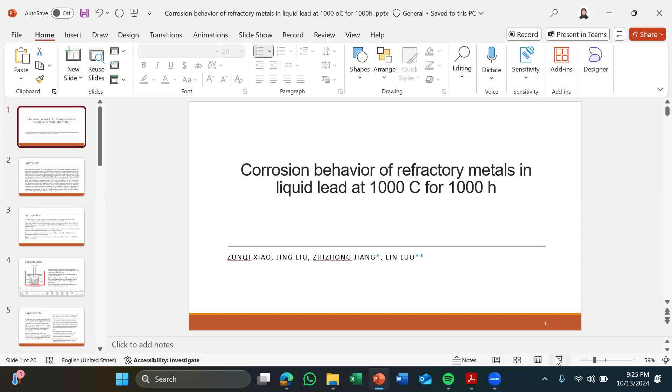This time I will continue to review a new paper. The title is Corrosion Behavior of Refractory Metals in Liquid Lead at 1000 degrees Celsius for 1000 hours by Zunqi Xiao et al., Lin Luo et al.

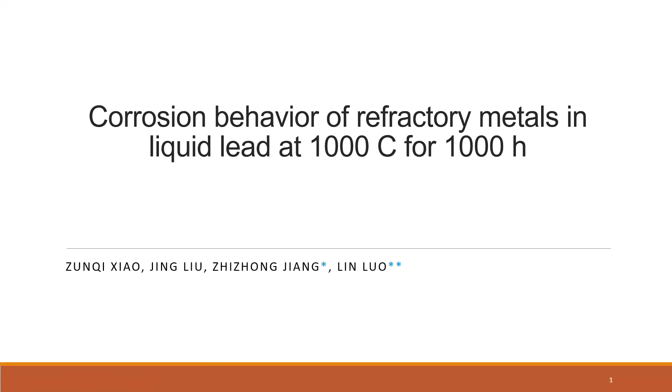For this paper, about the abstract, the lead-based fast reactor (LFR) has become one of the most promising reactors for Generation IV nuclear systems. A developing trend in LFR is high efficiency along with operation temperatures up to 800 degrees Celsius or even higher. One of the key issues in the high efficiency LFR is corrosion of cladding materials with lead at high temperatures.

In this study, corrosion behavior of some refractory metals, niobium, niobium alloy and molybdenum, was investigated in static lead at 1000 degrees Celsius for 1000 hours. The results showed that niobium and niobium alloy exhibit intense dissolution corrosion with obvious lead penetration after corrosion, and lead penetration extends along the grain boundaries of the specimen.

Furthermore, niobium alloy showed better corrosion resistance than niobium as a result of elements of W and molybdenum included in the niobium alloy. Molybdenum alloy showed much better corrosion resistance than niobium and niobium alloy, and no lead penetration could be observed. However, an etched morphology appeared on the surface of molybdenum alloy, indicating the occurrence of corrosion to a certain degree.

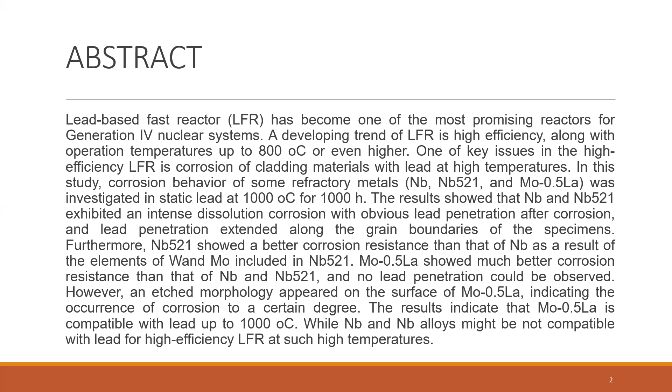The results indicate that molybdenum is compatible with lead up to 1000 degrees Celsius, while niobium alloys might not be compatible with lead for high efficiency LFR at such high temperatures.

And next, talk about the introduction. The development of materials highly corrosion resistant to lead-bismuth and lead environments is one of the key issues of development of LFR. Rivai et al. studied the corrosion behavior of some refractory metals (W, molybdenum, and niobium) in LBE with oxygen concentration of 5 times 10 to the power minus 6 weight percent at 700 degrees Celsius by means of stirred-type corrosion test.

Also found that molybdenum and tungsten exhibit high corrosion resistance to liquid lead with oxygen concentration of 4.5 times 10 to the power minus 7% at 700 degrees Celsius. However, investigations on corrosion behavior of these materials in LBE and lead at temperatures above 700 degrees are limited. So in the present study, corrosion behavior of some refractory metals in static lead at 1000 degrees Celsius for 1000 hours was studied.

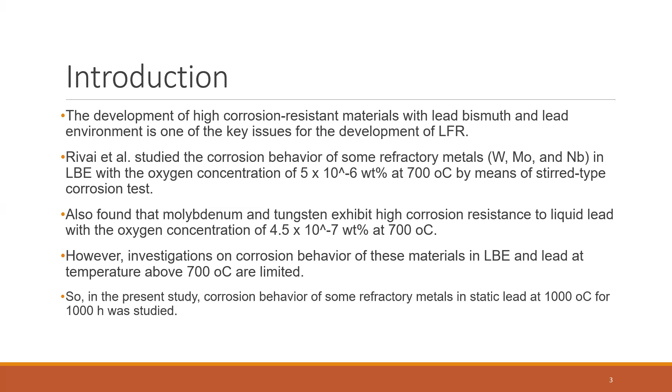This is a schematic diagram of the corrosion device. The materials tested in the study were three commercial refractory metals: niobium, niobium alloy, and molybdenum alloy. The corrosion medium used in this study was lead. Its purity was 99.99%, and the size of the crucible was 180 millimeter in height, 110 millimeter in outer diameter and 5 millimeter thickness.

The quantity of the liquid was 12 kilograms in the experiment, and the gas system was to provide an inert gas, argon gas environment in the tank and crucible. This table is about the chemical composition of test materials in weight percent, about niobium, niobium alloy, and molybdenum alloy.

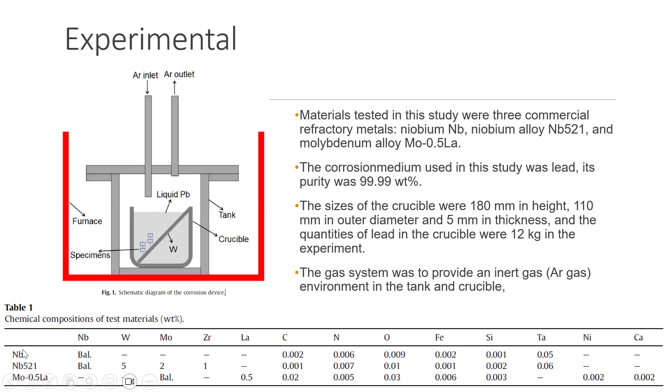In this experiment, the density of W is much higher than that of lead, so the specimen fixed on the W block got immersed in liquid lead instead of floating on the surface of liquid lead. The temperature of liquid lead was 1,000 degrees Celsius. The total time of the corrosion test was 1,000 hours, and specimens were taken out from liquid lead at 500 hours and 1,000 hours, respectively.

After the corrosion test, half of the specimens used for surface and weight loss analysis were immersed in liquid LBE at 380 to 400 degrees Celsius under the protection of argon gas to remove the residual lead. And then they were immersed in hot glycerin at 160 to 180 degrees Celsius to remove residual LBE.

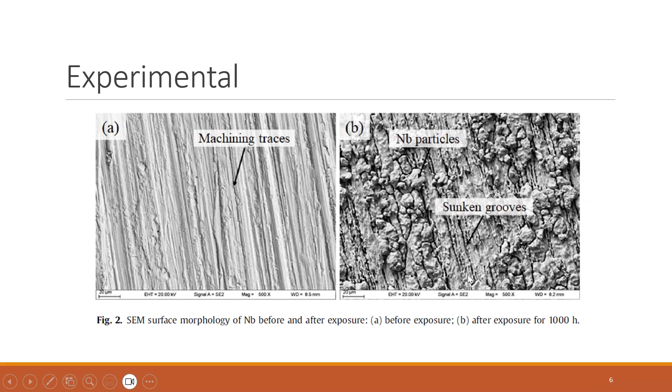And this is figure 2, SEM surface morphology of niobium before and after exposure. This is before exposure, you can see the machining marks, and this is after exposure for 1,000 hours. So these are Nb particles, and these are sunken grooves. And in figure 3, we can see SEM cross-sectional microstructure of niobium after exposure. This is for 500 hours and this is for 1,000 hours.

So we can see the difference in lead penetration. So yeah, you can see after 1,000 hours the lead penetration is deeper, more inside. And this is the EDS line scanning image. So we can see this for oxygen, this for lead, and this for niobium.

And you can see for niobium, the count is higher at between 40 and 60 micrometer.

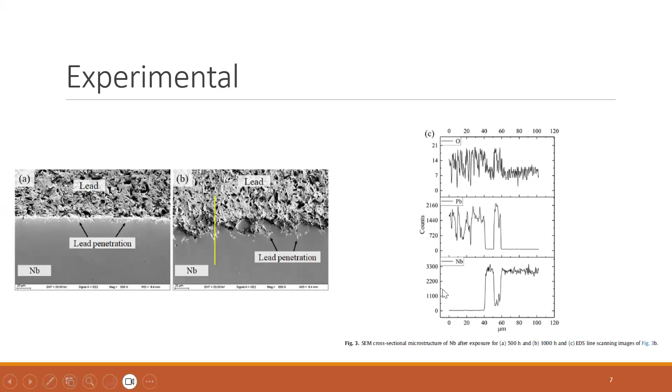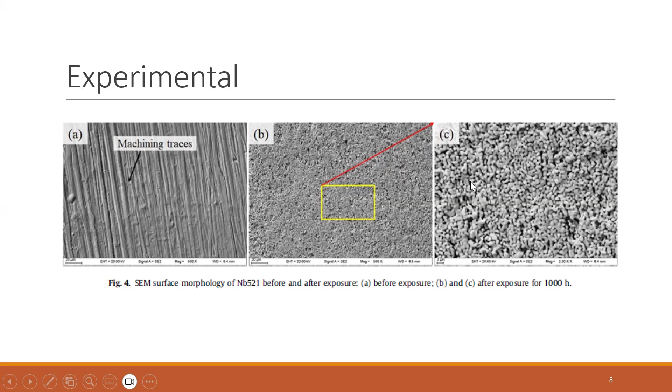And this figure 4 shows the surface morphology of niobium alloy before and after exposure. This is before exposure, we can see machining traces, and this is after exposure for 1000 hours. You can see in this part, if we zoom in, we can see the same surface morphology. And talk about the result.

Before exposure, niobium specimens showed clear machining traces, and uneven corrosion occurred, forming deep grooves along machining traces, and particles were also observed. After 500 hours, lead penetrated the niobium specimen to a depth of 5 to 10 micrometer. The interface was relatively flat, indicating the early stage corrosion.

After 1000 hours, penetration increased to 20 micrometer and the interface became uneven. Some of niobium particles peeled off. EDS analysis shows the trace of oxygen diffusion into the niobium specimen, indicating dissolution corrosion. The weight loss of niobium after 1000 hours was 178 gram per meter squared.

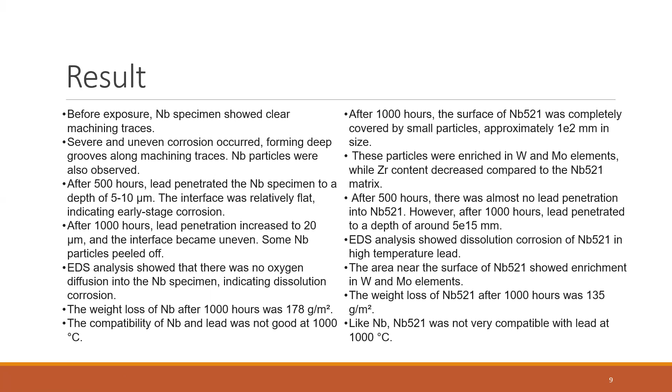After 500 hours, there was almost no lead penetration into niobium alloy. However, after 1000 hours, lead penetrated to a depth around 5 times 10 power 15 millimeter. EDS analysis shows dissolution corrosion of niobium alloy in high temperature lead, and the area near the surface of niobium alloy showed enrichment in W and molybdenum elements. The weight loss of niobium alloy after 1000 hours was 135 gram per meter squared. Like niobium, niobium alloy was not very compatible with lead at 1000 degrees Celsius.

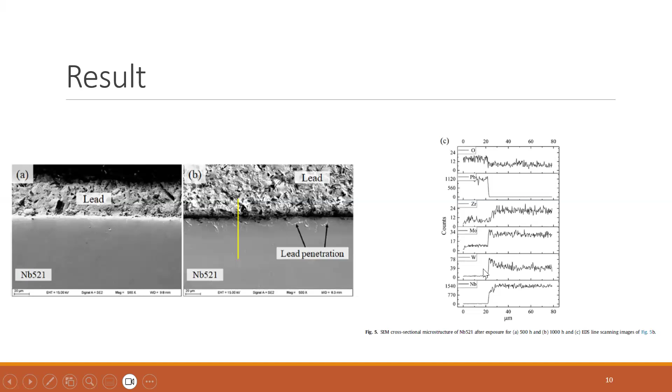So we can see in this figure 5, the corrosion microstructure of niobium alloy. This is exposure for 500 hours, and this is exposure for 1000 hours. You can see the depth of the penetration increased after exposure of 1000 hours. And this is the scanning image, and

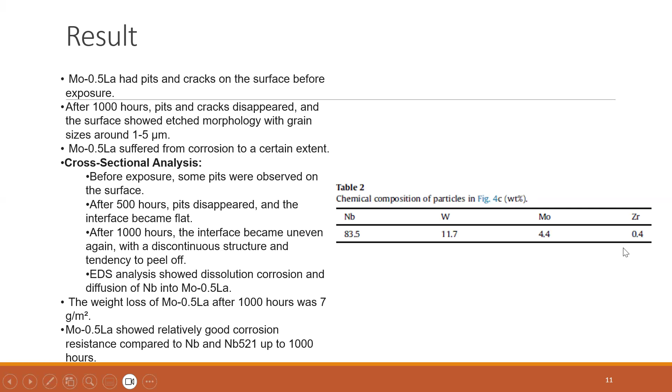And this result for figure 6, the cross-sectional microstructure of molybdenum alloy before exposure, and this after exposure for 1000 hours. So we can see this etched surface.

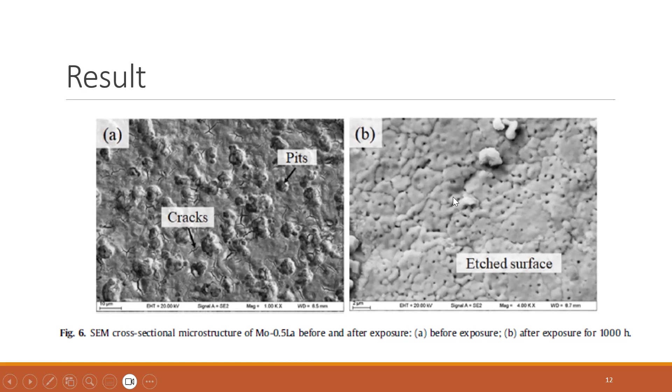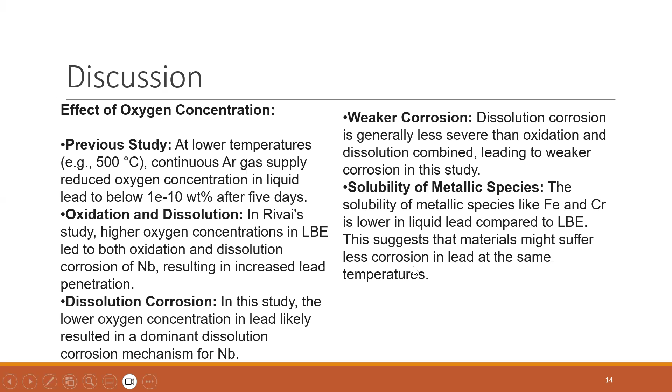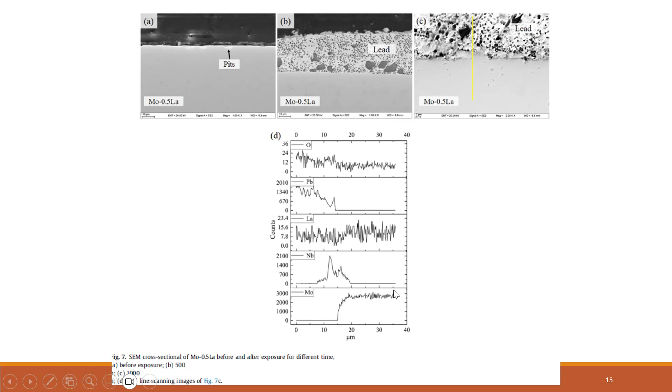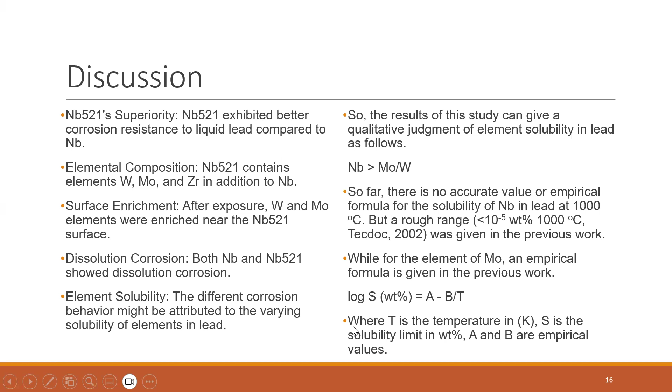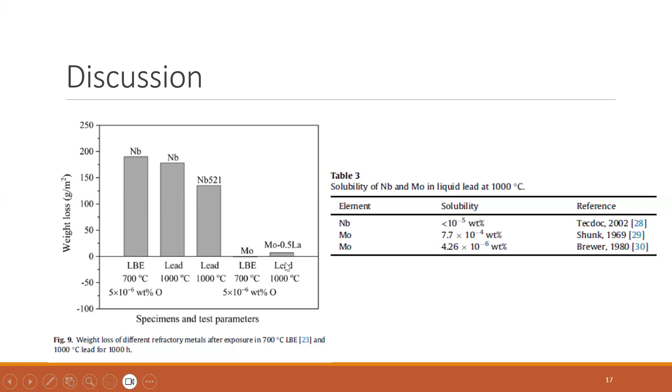And two studies, Shunk and Brewer, reported different solubilities of molybdenum in lead at 1000 degrees Celsius. Shunk's value was higher compared to Brewer's, and Brewer's value might be closer to the true solubility. Solubility data for tungsten in lead at 1000 degrees Celsius is limited, but likely less than this value. And lead penetration and corrosion behavior in niobium and niobium alloy are influenced by factors like oxygen concentration, temperature, and element solubility.

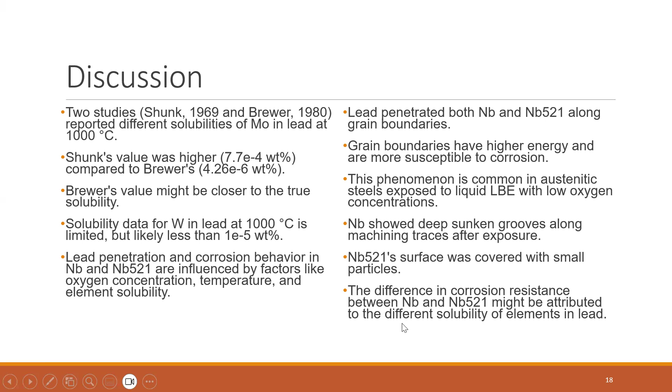Lead penetrates both niobium and niobium alloy along grain boundaries, since grain boundaries have higher energy and are more susceptible to corrosion. This phenomenon is common in austenitic steel, especially in liquid LBE with low oxygen concentration. Niobium showed deep sunken grooves along machining traces after exposure, and the niobium alloy surface was covered with small particles. The difference in corrosion resistance between niobium and niobium alloy might be attributed to the different solubility of elements in lead.

Molybdenum exhibited significantly better corrosion resistance in lead compared to niobium and niobium alloy. No lead penetration was observed in molybdenum alloy. Corrosion behavior of molybdenum in lead is strongly influenced by temperature. Molybdenum shows minimal corrosion at 700 degrees Celsius, but exhibited noticeable corrosion at 1000 degrees Celsius.

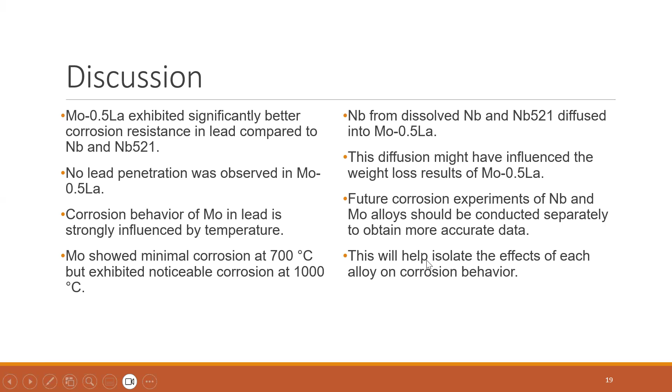And niobium from niobium and niobium alloys diffused into molybdenum alloy. The diffusion might have influenced the weight loss result of molybdenum alloy. Further corrosion experiments of niobium and molybdenum alloy should be conducted separately to obtain more accurate data. This will help isolate the effects of each alloy on corrosion behavior.

So, summary from this paper. One, niobium and niobium alloy showed distinct dissolution corrosion after exposure for 1000 hours. The penetration of lead into the specimen could be observed obviously, extending along the grain boundaries of niobium and niobium alloy. Furthermore, niobium alloy showed better corrosion resistance than niobium as a result of the elements tungsten and molybdenum included in niobium alloy, and the result of this study can provide some guidance for qualitative judgment of element niobium, molybdenum, and wolfram or tungsten solubility in high temperature lead.

Two, molybdenum alloy showed much better corrosion resistance than niobium and niobium alloy, and lead penetration was not observed. However, the etched morphology on the surface of molybdenum could also be observed, indicating the occurrence of corrosion to a certain degree.